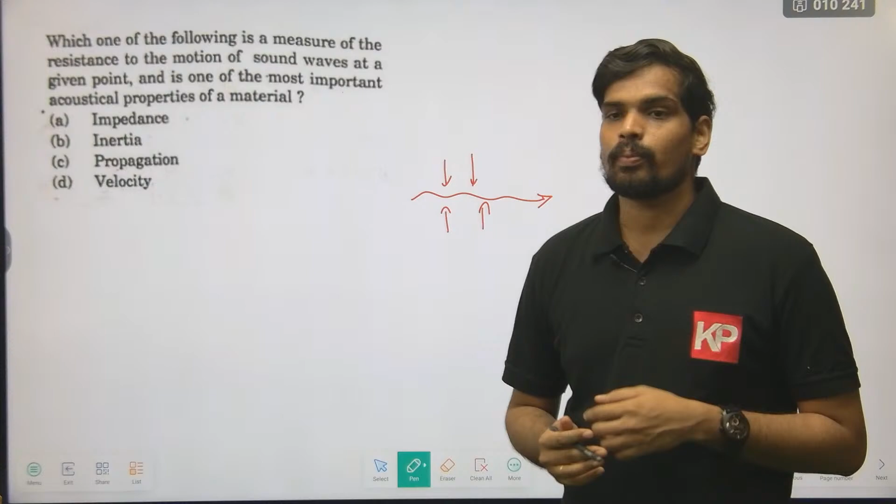For sound to travel, you always require a medium. It could be solid, liquid, or gas. When sound propagates through any medium, the surrounding particles provide some resistance. If this is a sound wave propagating through a medium, the surrounding particles provide a resistance to the propagation of the sound wave, and that is referred to as acoustic impedance.

From the given options, they're talking about impedance, inertia, propagation, velocity. Velocity obviously is distance traveled per unit time. They're talking here about the measure of resistance to the wave propagation. Basically sound is a series of vibrations. If I'm talking to someone in front of me, how does the sound propagate? It travels in the form of vibration of particles, and it reaches the person's ear finally. That's basically propagation of sound.

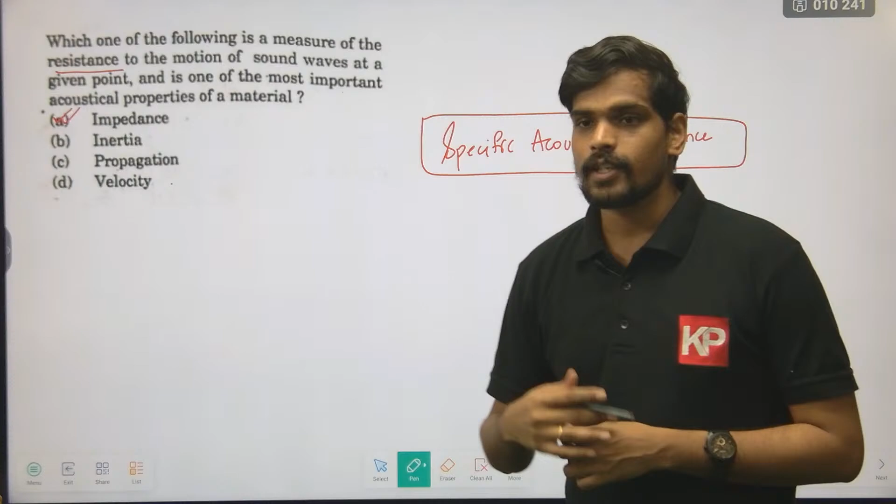During the propagation of these vibrations, the surrounding air particles offer resistance to the propagation of sound, which is referred to as acoustic impedance. There's a term, specific acoustic impedance. Not only the terms, you also can refer to the measurement unit. Generally in competitive exams, you do get questions on the measurement units of various terms, mainly from lighting and acoustics. So you need to be clear with the definitions of terms and the measurement units.

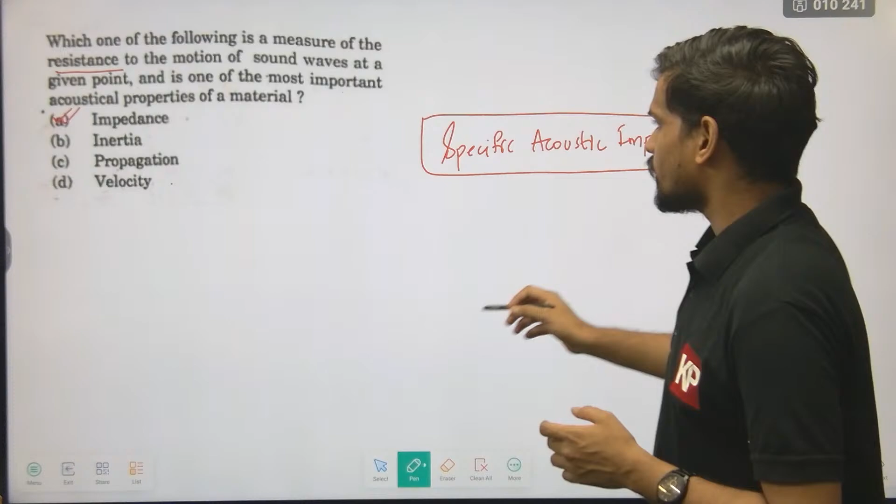Specific acoustic impedance is measured in rayls. That's a non-SI unit. The SI unit is Pascal second per meter. That's the measurement unit for specific acoustic impedance in SI units. So remember, what is impedance? It is basically the resistance to the propagation of a sound wave through a given medium. That's called impedance. So next question.

Consider the following characteristics in the mechanism of transmission of sound. They have given three statements and are asking which of the following statements are correct. The first statement: in solids, acoustic waves are always composed of longitudinal and transverse components for any given type of excitation. These phenomena depend on the types of bond existing between the particles. By reading the first point itself, you need to get a sense of what they are talking about in this question.

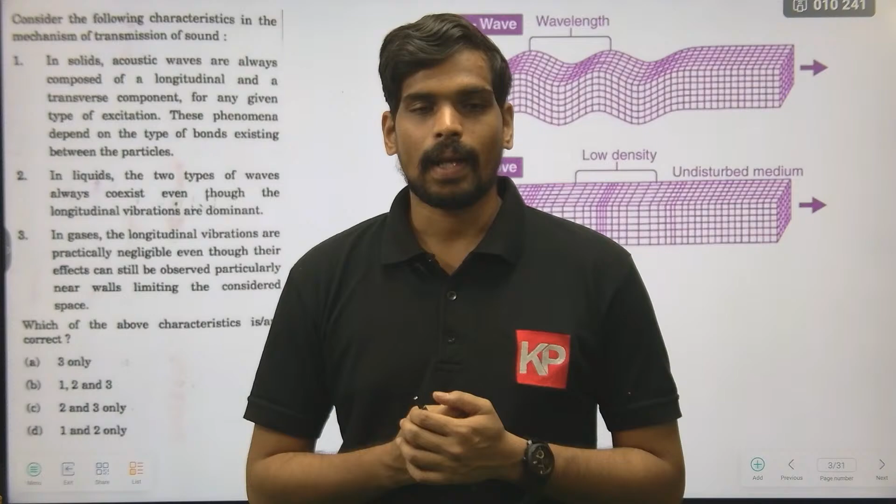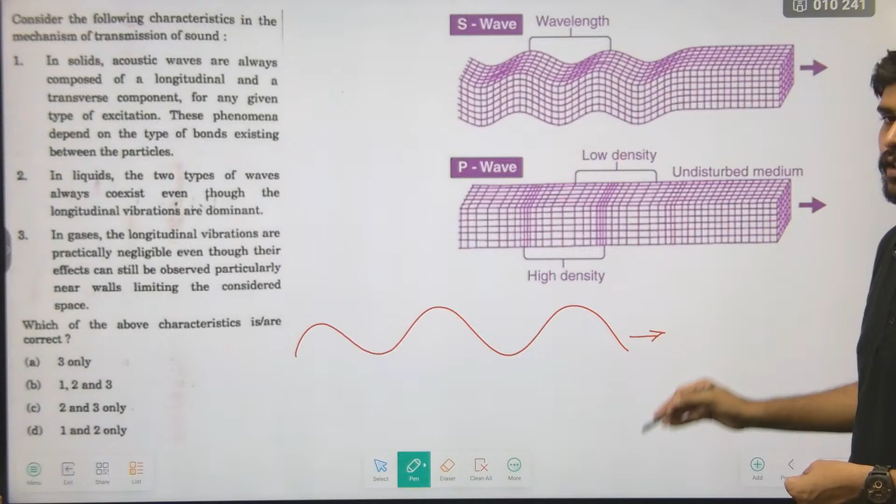They're talking about the types of wave propagation, in which form a sound wave propagates. Wave propagation is predominantly of two types: transverse and longitudinal. Let me give you a brief idea. A transverse wave is where the particles move perpendicular to the direction of propagation. If this is the direction of wave propagation, the particles oscillate upwards and downwards, like water waves in seas and oceans. That's called a transverse wave.

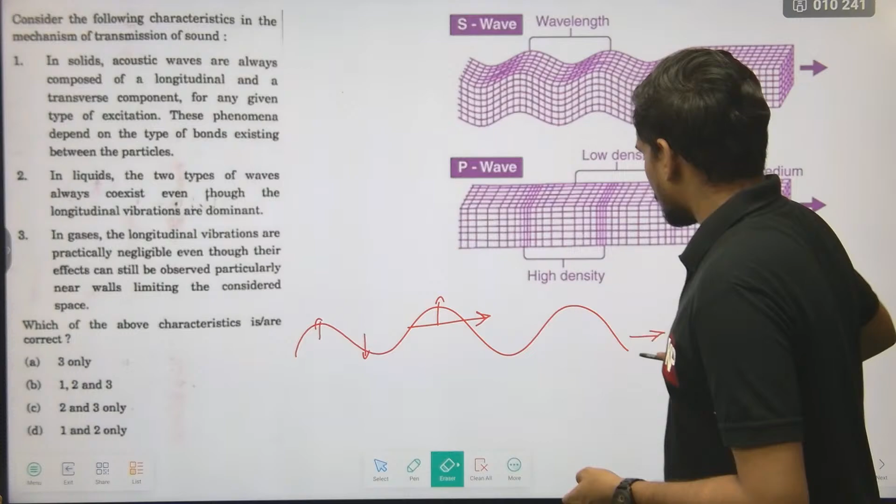Whereas a longitudinal wave is where the particles oscillate in the direction of propagation, generally sound waves in air. Sound waves in air travel in the form of compressions and rarefactions.

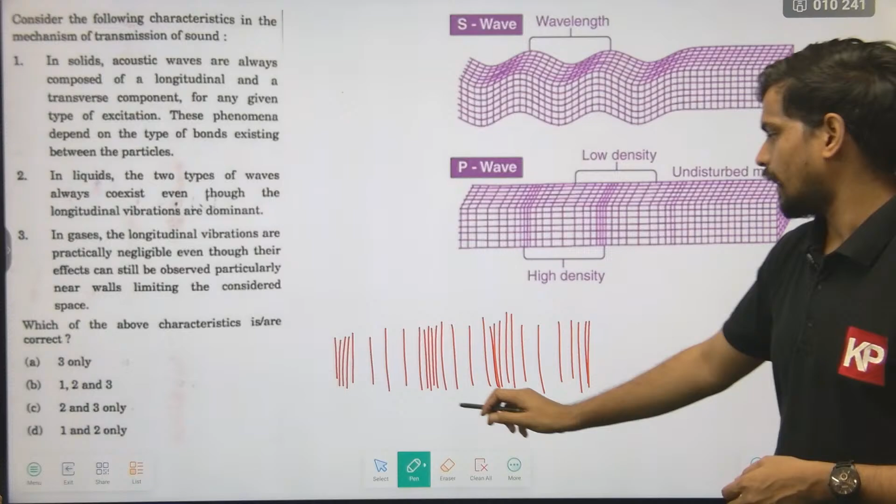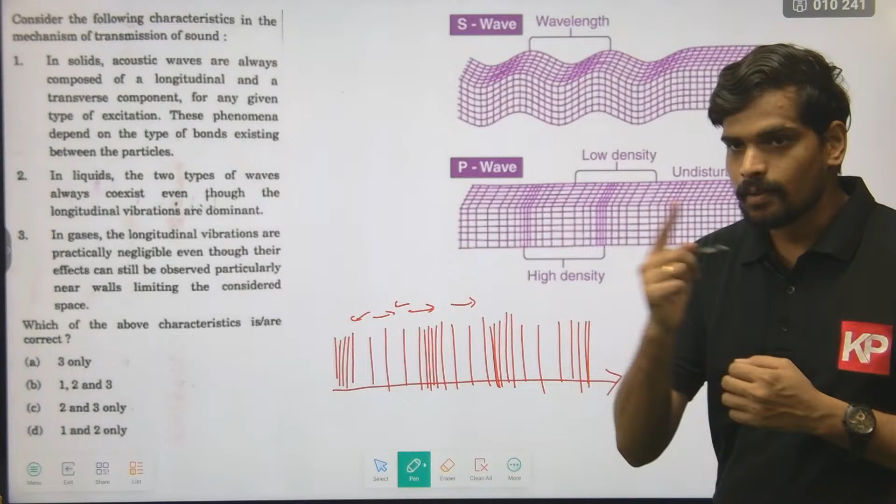A compression is where the particles come close to each other, and then they move further apart. So this is basically how a sound wave propagates in air, in the form of compressions and rarefactions. Here the particles are oscillating parallel to the direction of propagation. The particles are moving forward and backwards. So that's basically a longitudinal wave. So wave propagation is basically of these two types.

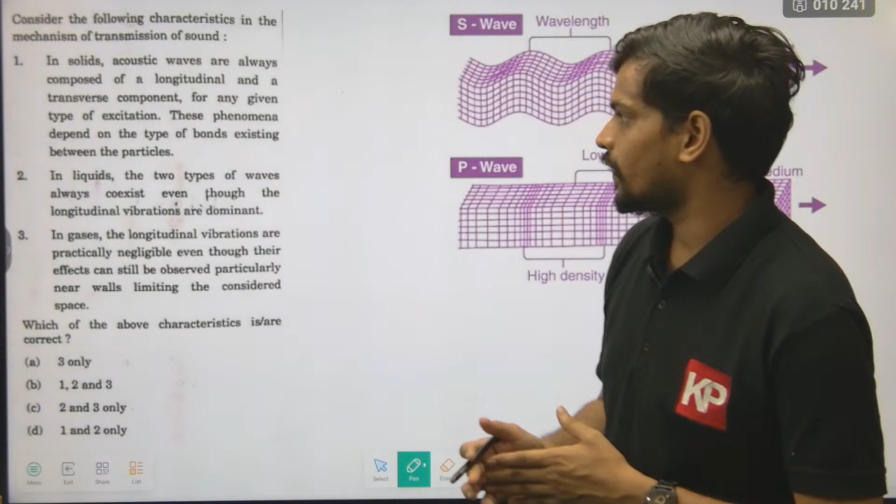Now let us look into the given statements. You can remember one point over here: sound waves, when they travel in air, predominantly travel in the form of longitudinal waves. In other media, they act in a different way. So if you look into the first statement, acoustic waves in solids particularly are a combination of both. One prime example for that would be seismic waves in the form of earthquakes. So I hope you all know about the basics of earthquakes or seismic waves.

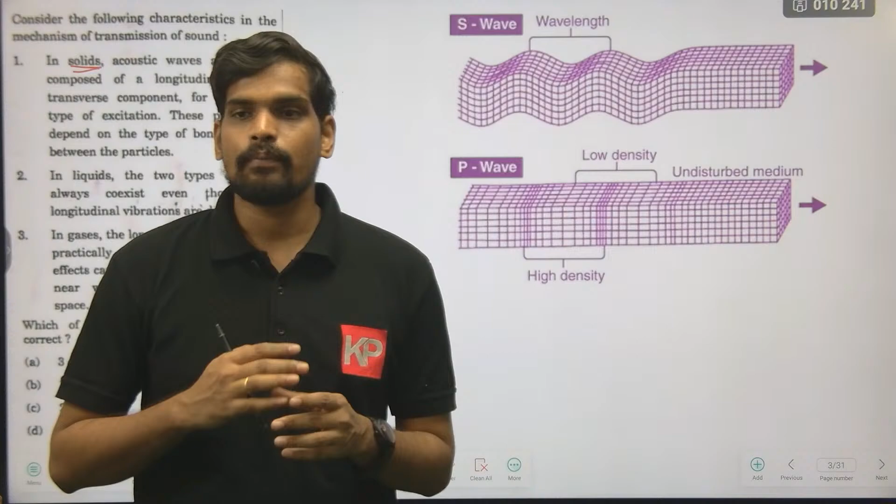You have P waves and S waves. I've added a diagram of it. P waves over here, P stands for primary. The primary waves in seismic waves, that is in an earthquake, propagate in the form of compressions and rarefactions. You can look at that in this picture. That's basically in the form of a longitudinal wave.

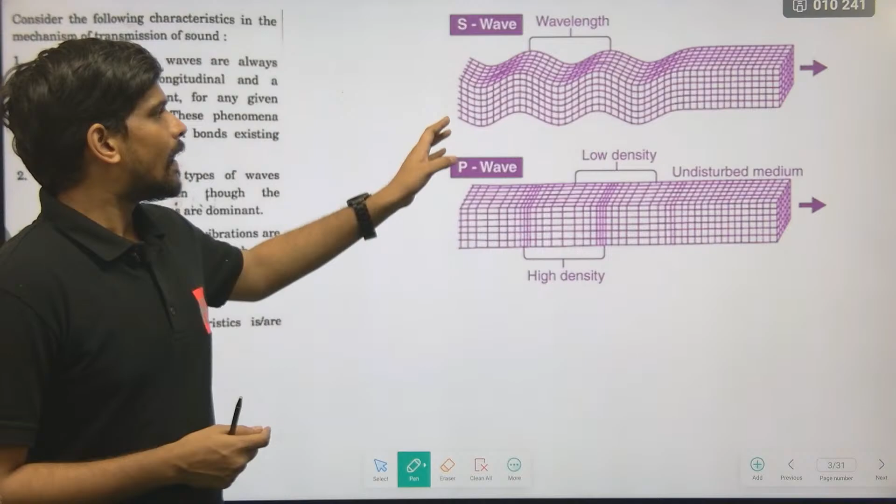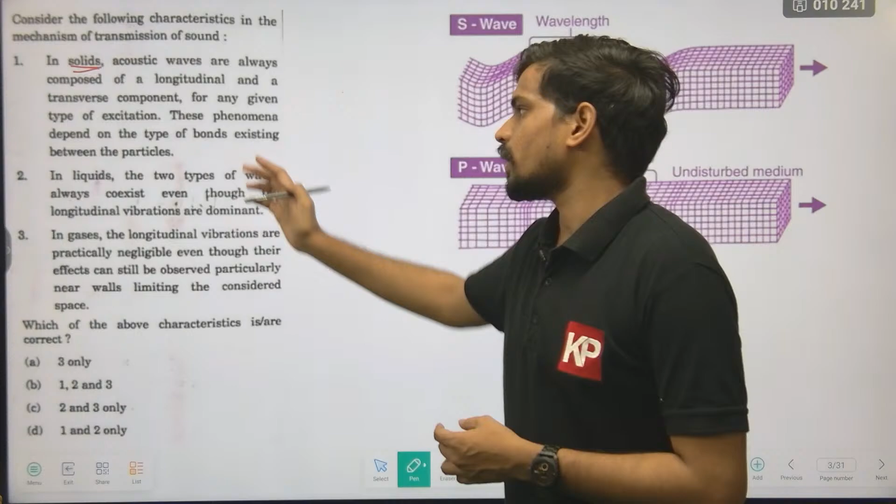The secondary waves or S waves in a seismic wave propagate in the form of a transverse wave. So a seismic wave is a type of acoustic wave which is a combination of both P wave and S wave. There are various other types of seismic waves. So in solids, acoustic waves can travel as both transverse and longitudinal waves, and it depends on the properties of the particles in that medium. So that's a correct statement actually.

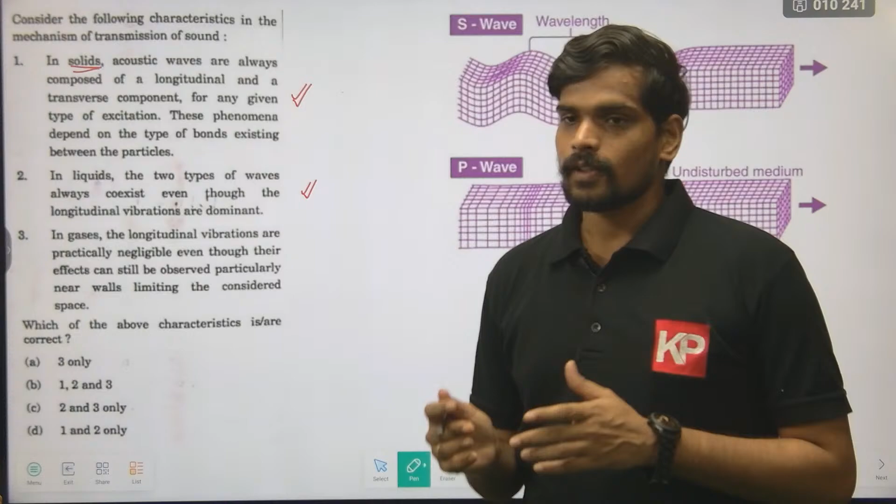The second statement: in liquids, the two types of waves always coexist even though longitudinal vibrations are dominant. That also is correct. So even in liquids, it is a combination of both. However, longitudinal wave propagation is the predominant type of propagation for acoustic waves. In gases particularly, sound always propagates in the form of a longitudinal wave.

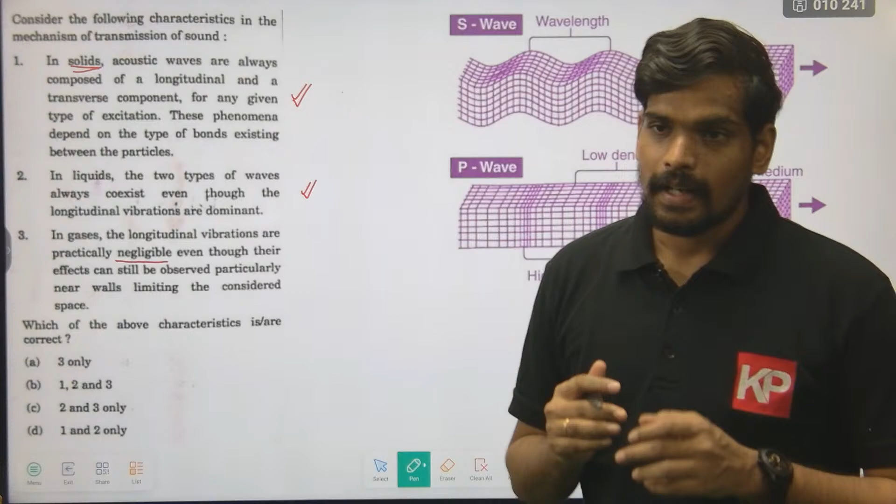So let us see the third option. In gases, the longitudinal vibrations are practically negligible, even though their effects can still be observed, particularly near walls limiting the considered space. That's an incorrect statement, because in gases sound always propagates in the form of a longitudinal wave. Transverse propagation is negligible or not present. So this is an incorrect statement.

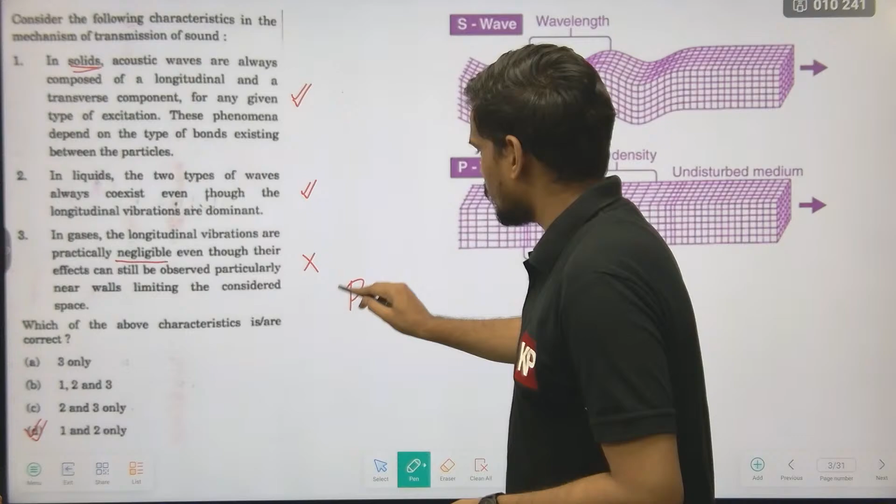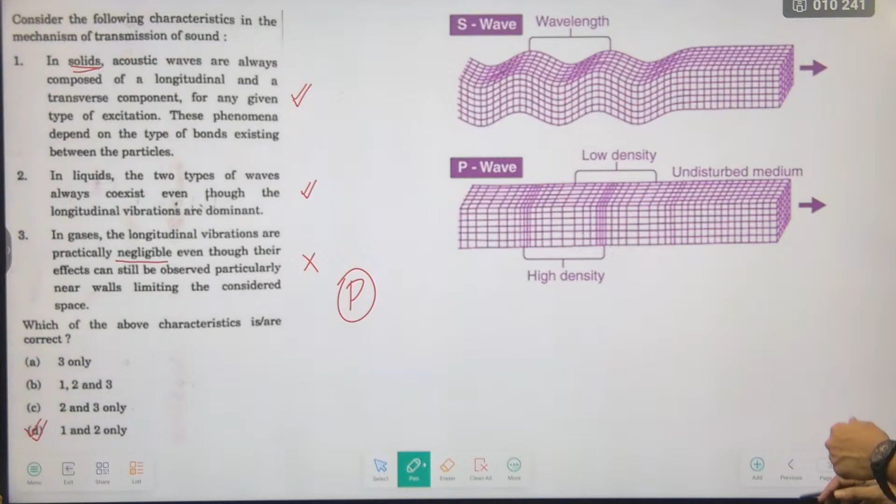The correct statements in the given question will be 1 and 2 only. So option D will be the correct answer here. So remember the propagation of acoustic waves in all three media, and the type of wave in which they propagate. That's about the third question.

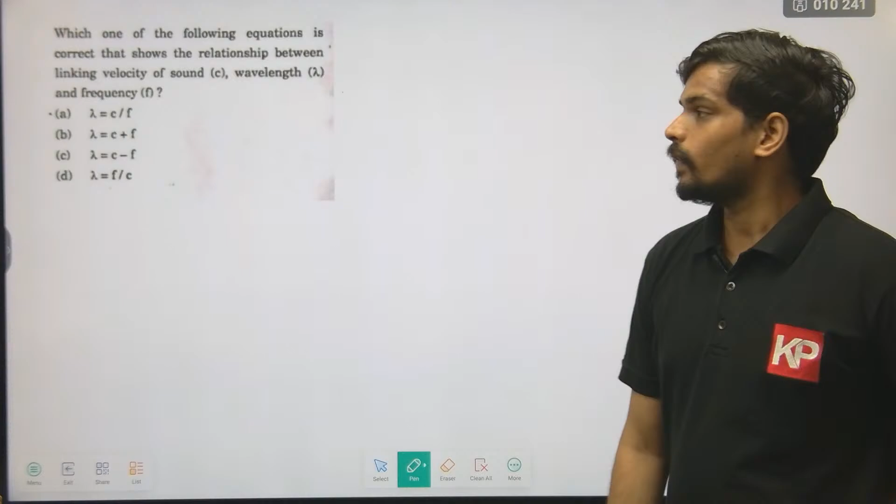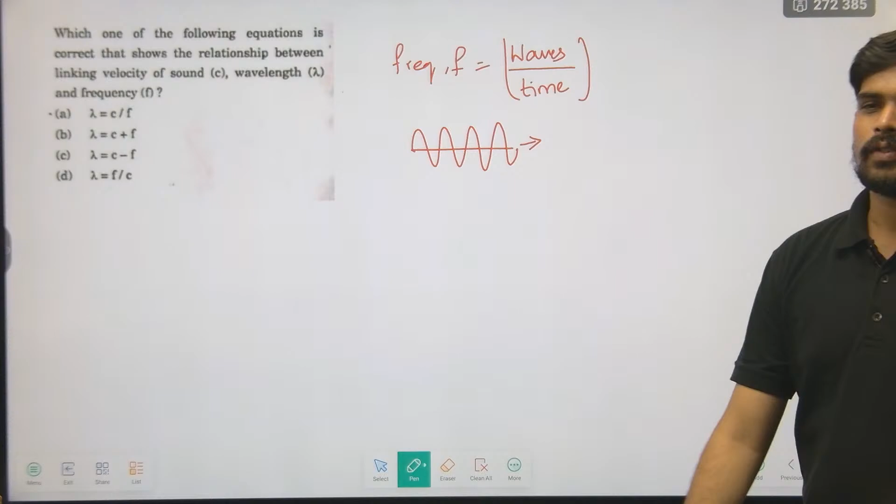So if you look into what frequency is, frequency is nothing but the number of waves propagating per unit time. So it is basically measured in waves per unit time. So in 1 second or in 1 minute, how many waves are propagating, be it longitudinal or transverse waves. That's called frequency. Next is wavelength.

If you're denoting it by lambda, wavelength is defined as the distance traveled by one wave. So distance propagated by one wave, that's called lambda, wavelength. Distance of one wave, distance per wave, horizontal distance traveled by one wave, that's called the wavelength.

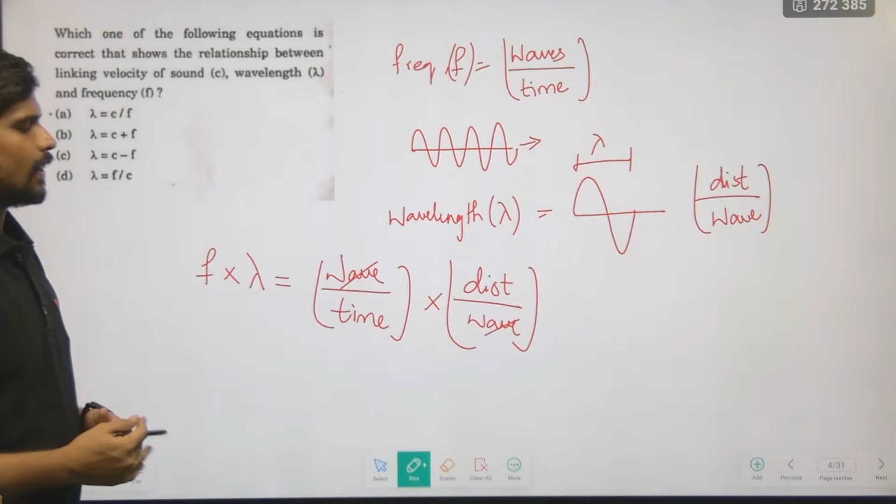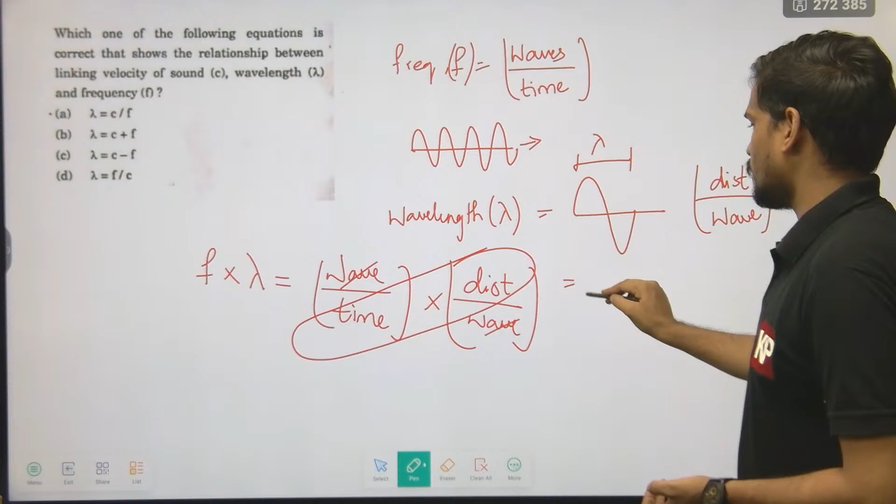If you multiply frequency and wavelength, you will be getting number of waves per unit time multiplied by distance traveled by one wave. That's what you will get. So if you're talking about one wave, if you just cancel that out, you'll get distance traveled per unit time, which is nothing but velocity. Distance traveled per unit time is called velocity. So that's a simple way you can understand, that is C. So C is equal to F into lambda.

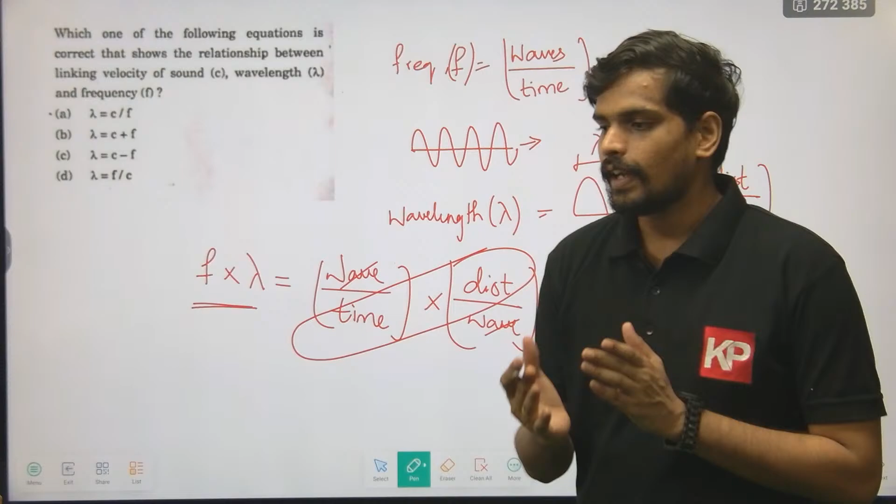They're talking about the relation of wave. They have given the equation in the form of lambda is equal to dash. So if you rewrite the given equation, frequency into wavelength is equal to velocity. So wavelength will be velocity upon frequency, c upon f. Lambda is equal to c upon f is given in option A. That would be the appropriate answer from the given options. So that's a simple question asking a relation between velocity, frequency, and wavelength. Let's now look into the next question.

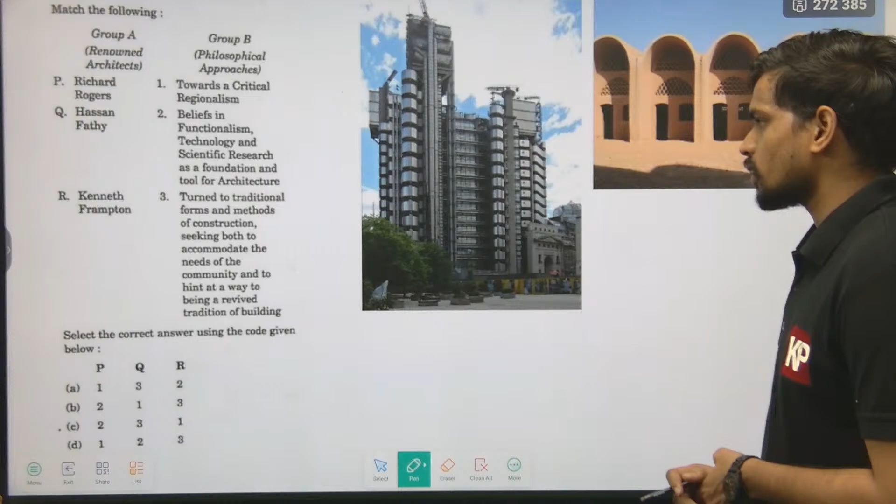The next one, again a question on architects and their works. In Group A, renowned architects Richard Rogers, Hassan Fathy, Kenneth Frampton are given. In Group B, their philosophical approaches are described. You need to match them. So let us go through the philosophical approaches in Group B first. The first one is towards a critical regionalism.

Towards a critical regionalism is a paper published by Kenneth Frampton in the context of modernism and postmodernism. During the time of modernism, he published this paper, where he argued that universality, or design uniform throughout the world, is not something good, and he propagated regional aspects to be included. That was the basic premise of this paper. So Kenneth Frampton is associated with the concept of towards a critical regionalism.

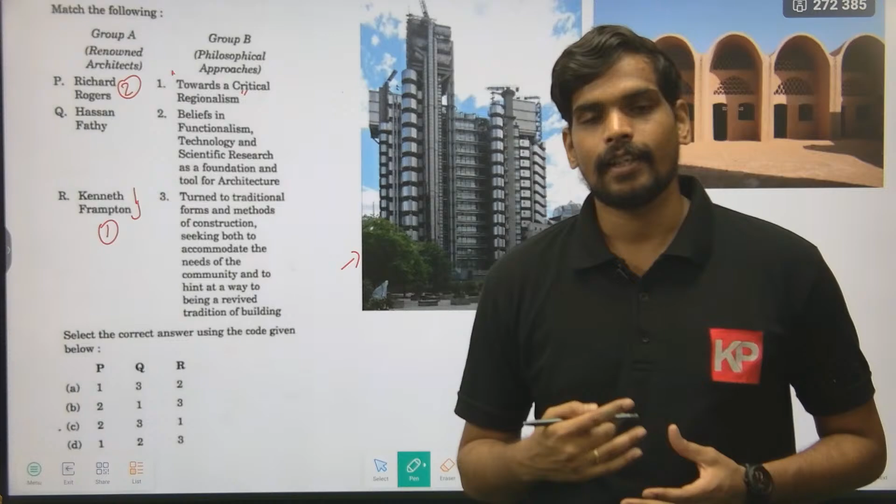So one for R. The second philosophical approach, belief in functionalism, technology and scientific research as a foundation and tool for architecture. This for sure will be architect Richard Rogers. You can see in this picture, I have added a building. Richard Rogers is a British architect well known for propagating the style of high-tech architecture, also called structural expressionism, and he's also associated with Bowellism in architecture.

The building you see here is Lloyd's building in London, designed by Richard Rogers. It is a prime example of Bowellism and structural expressionism, also called high-tech architecture. Structural expressionism is where the structural elements of the building are exposed. Bowellism is a style where the internal organs or service lines of the building are exposed, be it the elevators, staircase, fire safety, or HVAC lines. All these will be exposed outside the building.

The Pompidou Center in Paris is also a prime example of Bowellism. For that, Richard Rogers was a co-architect along with Renzo Piano. So Richard Rogers is associated with a focus on technology and scientific research, with high-tech architecture, also called structural expressionism, and Bowellism.

Hassan Fathy is an Egyptian architect. You can look at an example of the architectural features of his buildings. Hassan Fathy is a renowned Egyptian architect who worked on vernacular concepts of that region. He mainly focused on adobe and earth-based construction. He turned to traditional forms and methods of construction, seeking both to accommodate the needs of the community and to hint at a way to a revived tradition of building.

So revival forms, looking for traditional features, elements, materials and construction techniques which are locally available. That's what vernacular architecture is. So Hassan Fathy is associated with vernacular architecture. So 2-3-1 is the correct answer, which will be option C. You need to understand the architects and their works, the philosophies and the styles they belong to.

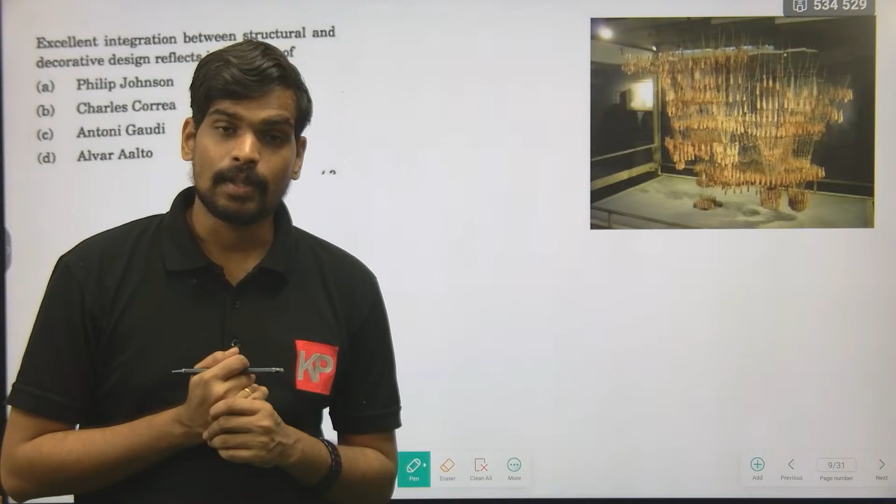The next one, excellent integration between structural and decorative design reflects in the works of Philip Johnson, Charles Correa, Antoni Gaudi, Alvar Aalto. So among the given options, one prime example of excellent integration between structural components and design is the sandbag model, also called the chain model, in which Antoni Gaudi used to suspend sandbags and look at the geometric forms evolved out of this suspension, and he used those to replicate the orientation of building components in various churches. So Antoni Gaudi is the appropriate answer.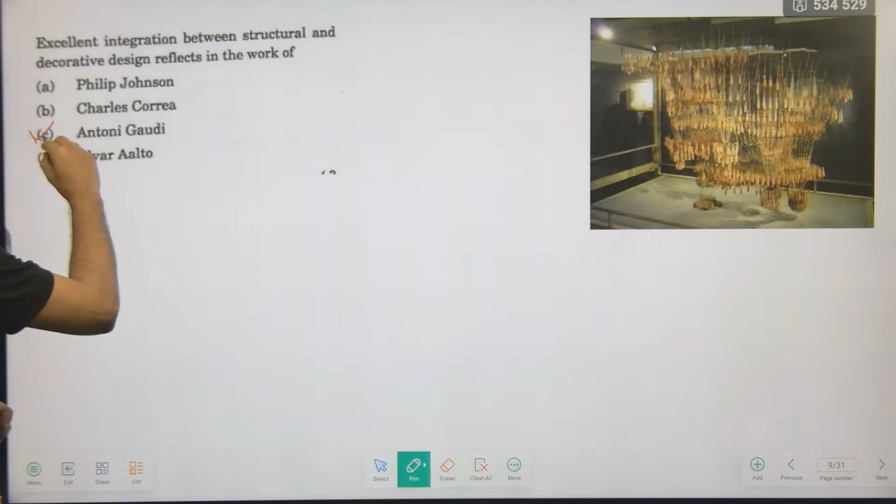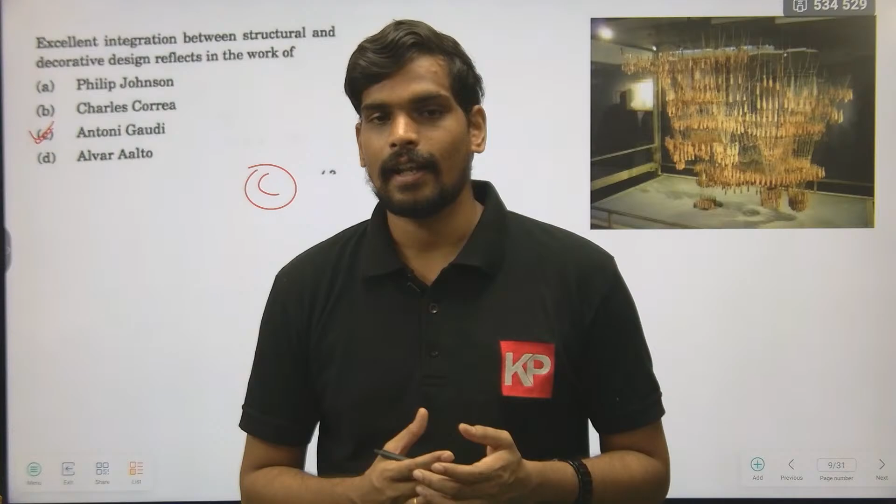Even in a lot of churches designed by him, he made use of such tools of suspension model, where the main motive of him was to integrate the structural and decorative work. If you look into Sagrada Familia also, you see those columns which are not linear, they are inspired from nature. It is also said that Antoni Gaudi developed his ideology towards architectural design similar to biomimicry, where he tried to mimic natural forms like trees, branches, and all those features in his works. So the answer over here is Antoni Gaudi. Option C would be the appropriate answer.

You can remember that during Nazi Germany before World War II, this school was closed down by Nazis, and then Ludwig Mies van der Rohe, who was the last director of this school, started practicing in the United States after leaving Germany. So during the couple of decades for which Bauhaus functioned in Germany, there were three main people associated with Bauhaus. The first one, the founding director, was Walter Gropius.

Walter Gropius was the first architect director of this Bauhaus school. Second one was Hannes Meyer. And third architect director was Ludwig Mies van der Rohe. So these are the three architect directors associated with Bauhaus school of thought, which you have to remember, which can be asked in the examinations too. So answer over here is Walter Gropius, the founding director of Bauhaus.

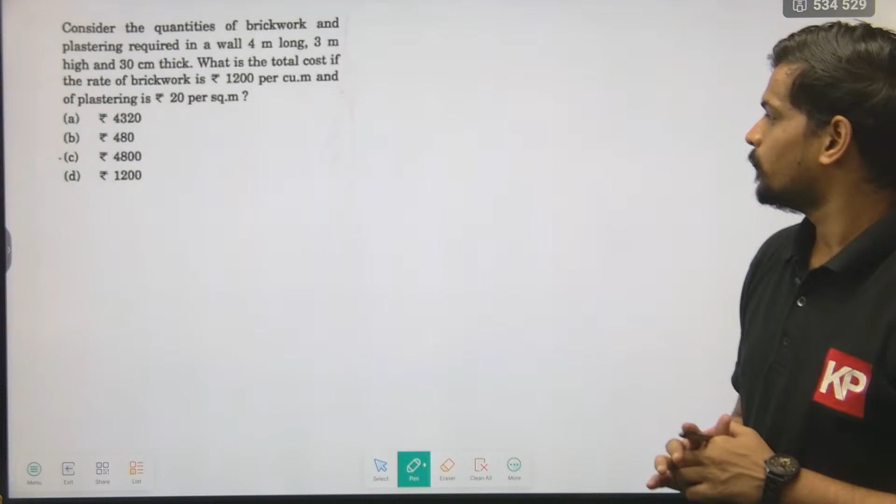Next one, consider the quantities of brickwork and plastering required in a 4-meter long, 3-meter high, and 30 centimeter thick wall. What is the total cost if rate of brickwork is 1200 per cubic meter and plastering is 20 per square meter?

So this is something which is very simple, but remember, in UPSC examination you will not have a calculator with you. So there is no provision where you can carry your calculator, and this is something which you need to solve using pen and paper. So you'll need to do it carefully and not make any mistakes in the multiplication part, otherwise it's a very simple question. Let's look into this.

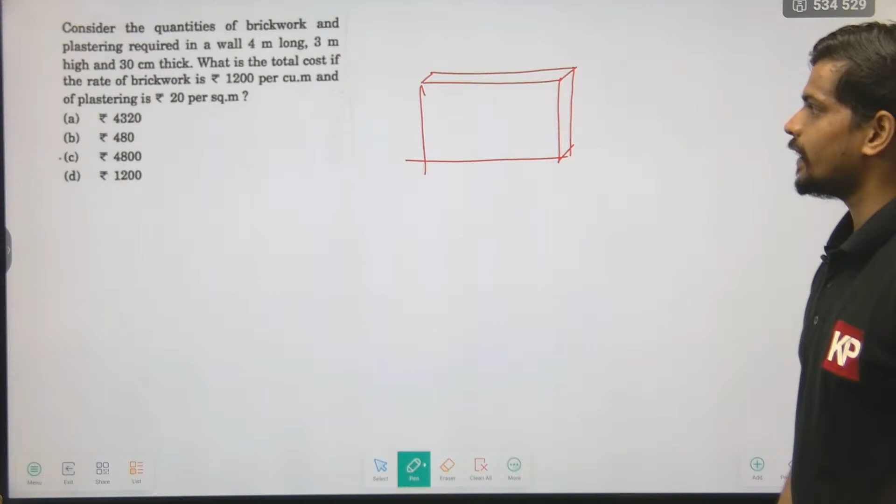So the size of the wall is given as 4 meter by 3 meter. That's the dimension of it. Thickness of it is 30 centimeters. So firstly, let us try to estimate the total quantity of brickwork. The total quantity of brickwork will be 4 meter by 3 meter by 30 centimeters. 30 centimeters, if you convert it into meters, you will get 0.3. So multiplying this, 4 into 3 is 12. 12 into 0.3 will be 3.6 cubic meter. That's the quantity of brickwork.

Now what will be the cost associated for brickwork? It is given in the question as the rate is 1200 per cubic meter. So the cost will be 1200, which is per cubic meter, multiplied by the total quantity of work, 3.6. Multiplying this, I think you should get 4320 rupees. You can cross check, you can do the calculation with pen and paper. So you will get rupees 4320 for the cost associated with brickwork.

But they're also talking about the total cost, not only brickwork. So total cost will also include the plastering cost. So let us look into the plastering now. Always remember, whenever you get questions this way, where they give you a wall and talk about plastering estimation, you should take both the opposite faces of the wall, not just one. So what will be the total plastering work? There will be two faces, front and back, of size 4 into 3. So 4 into 3 is 12, 12 into 2 is 24 square meter. That's the total area of plastering.

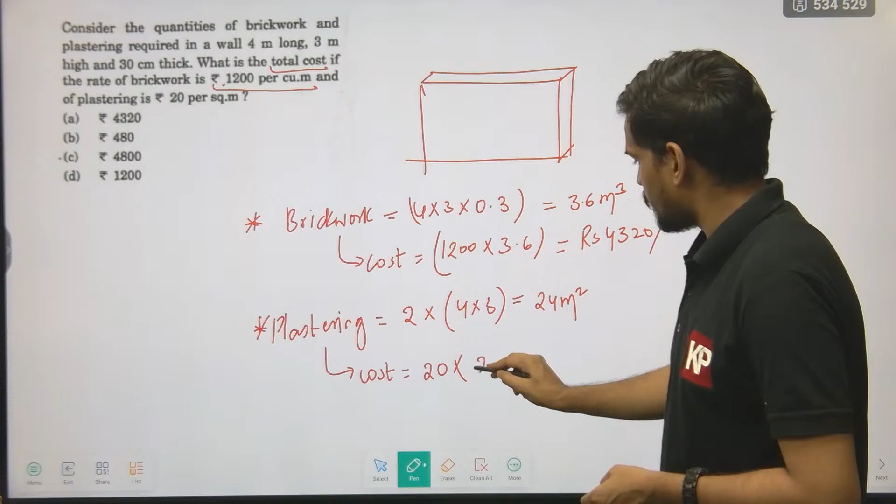The rate is given as 20 rupees. So what will be the cost associated with plastering? It will be cost of plastering per square meter, which is 20 rupees, multiplied by 24 square meter. That's the total work. So this should give you rupees 480. 24 into 2 is 48. So this will give you rupees 480 as the answer for the plastering cost.

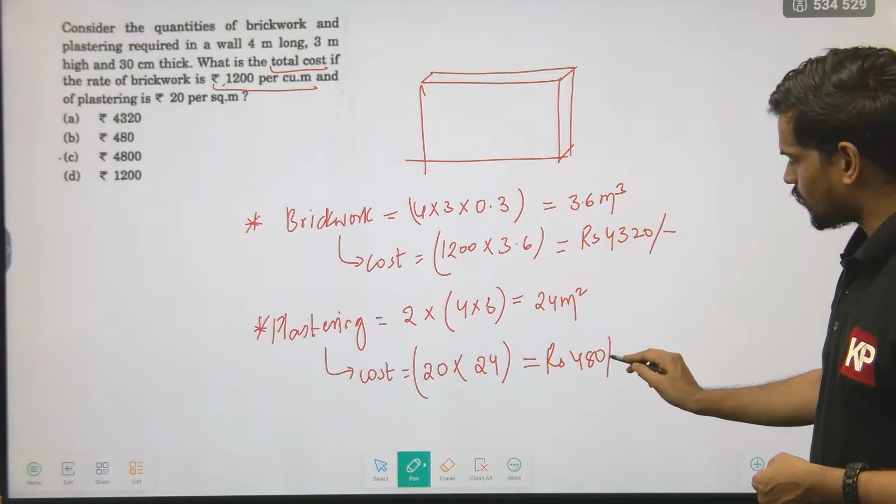Now the total cost will include both these values. This 4320 plus 480, adding these two, I think you should get the answer as 4800. So option C will be the appropriate answer. 4320 plus 480 will give you 4800 as the correct answer for this question. So it's a simple question which is based on simple math, nothing difficult at all. So next one.

Consider the following statements. Again, this is a question related to the estimation and specification topic. Consider the following statements regarding the process of preparing a building estimate. So while preparing an estimate, they're talking about some quantities of works. So first point: pointing is calculated in square meter for the whole surface and deductions similar to plastering are made. Now what is pointing? You can answer this question only if you know what pointing is. Pointing is nothing but finishing of the mortar joints.

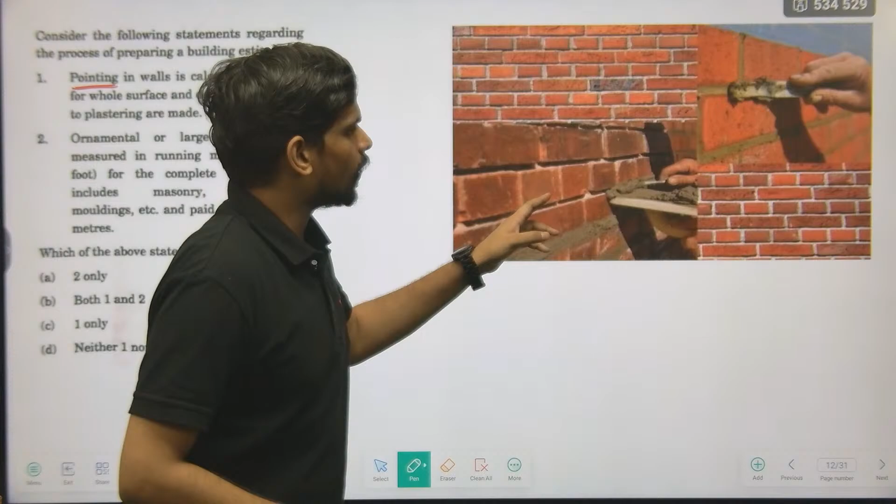If you look into this picture, this is an exposed brickwork. You have these mortar joints. You cannot leave them unfinished if it is exposed brickwork. Particularly in exposed brickwork, you need to finish them to give a smooth surface or a smooth line of different profiles, which is generally done using this tool used in masonry work, which is called a jointer.

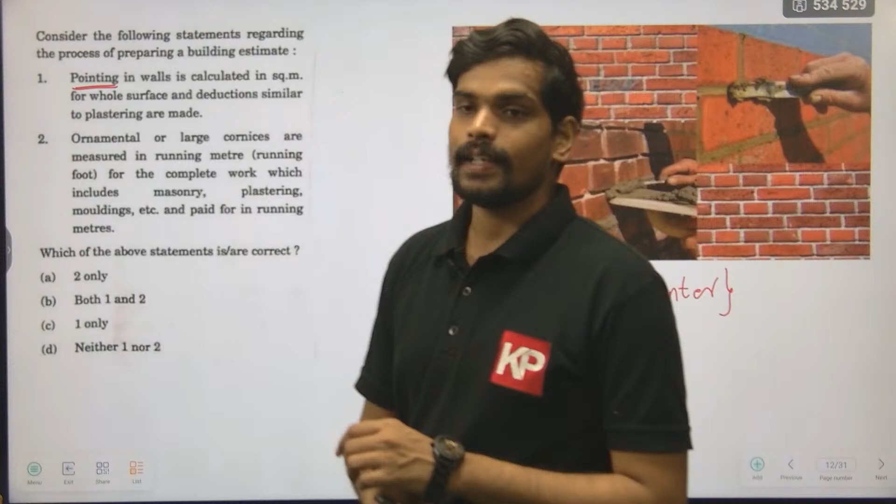This is a question which was asked in a competitive exam once, I think in DDA, not in UPSC, but it has been asked in the past in a competitive exam. What is the use of this tool jointer in masonry? It's a tool which is used for pointing work. Pointing is nothing but finishing of mortar joints.

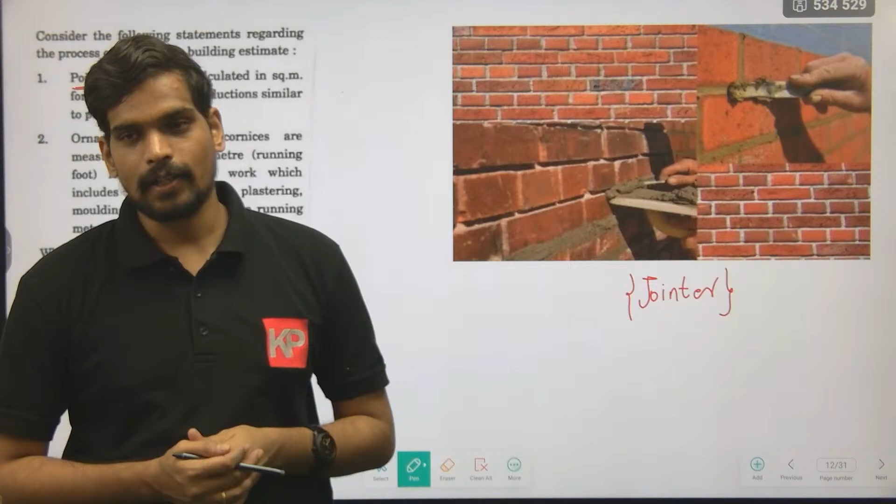Now this is estimated. Just imagine if you're looking into a wall, you will have pointing work not only in one dimension. If you just observe, pointing is not just a single straight line. You also have the vertical joints, right? So pointing work is not only associated with horizontal ones, but also with the vertical lines.

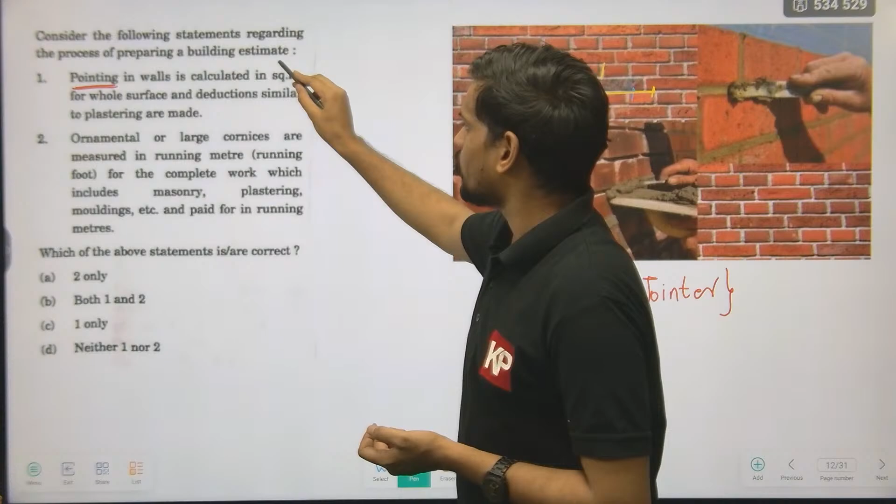Now if something is only linear, only in a straight line fashion, that's where you measure it in running meters. But here they're talking about square meter. Is that correct? Absolutely yes. Pointing is measured in square meter because it's not a linear work. It is something where you have horizontal and also vertical lines. It is generally estimated just like plastering.

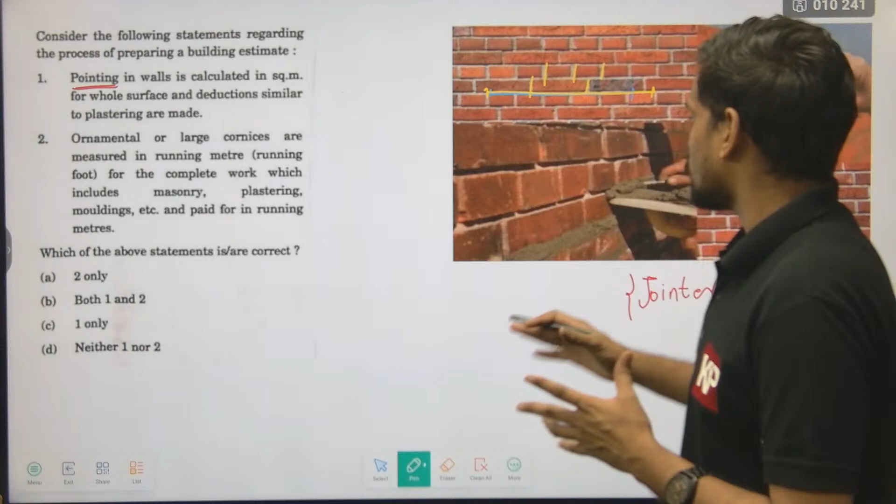Generally, as a thumb rule, mortar of around 0.6 cubic meter is used for every 100 square meter of pointing. So based on the total work of pointing, the quantity estimation is generally done for pointing work, and the estimation is always done in square meter. In BOQ also, pointing is always measured and noted down in square meter only.

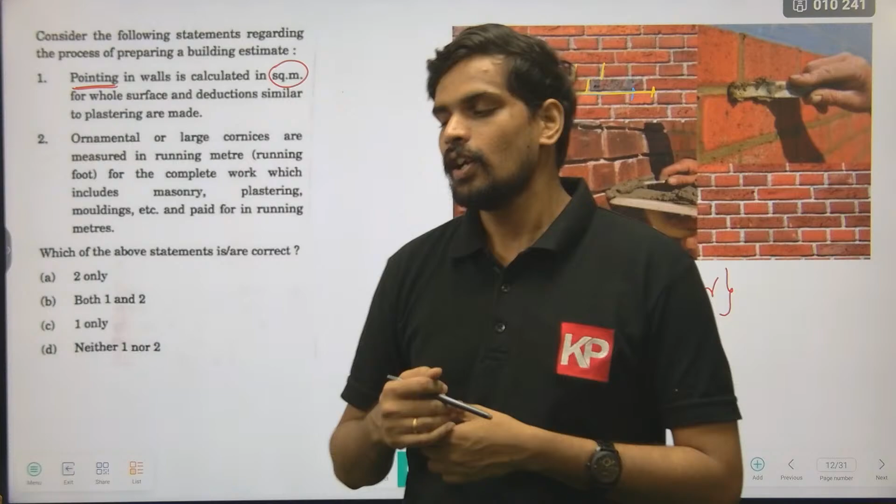Deductions are similar to plastering: deductions will include the door and window areas, or say the jamb surfaces of openings. All these are the deductions. Even for pointing you will have the same deductions. In a wall, if you're having a door and window, that will come under the deduction part. So this first statement is a correct statement.

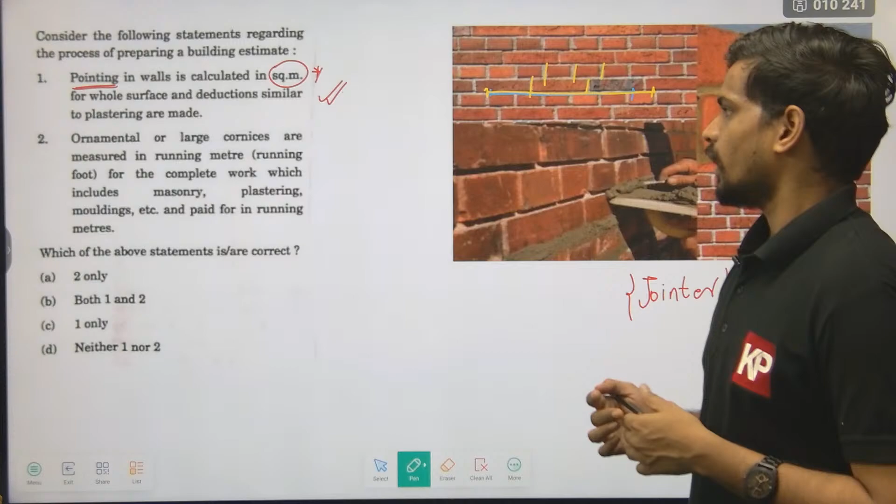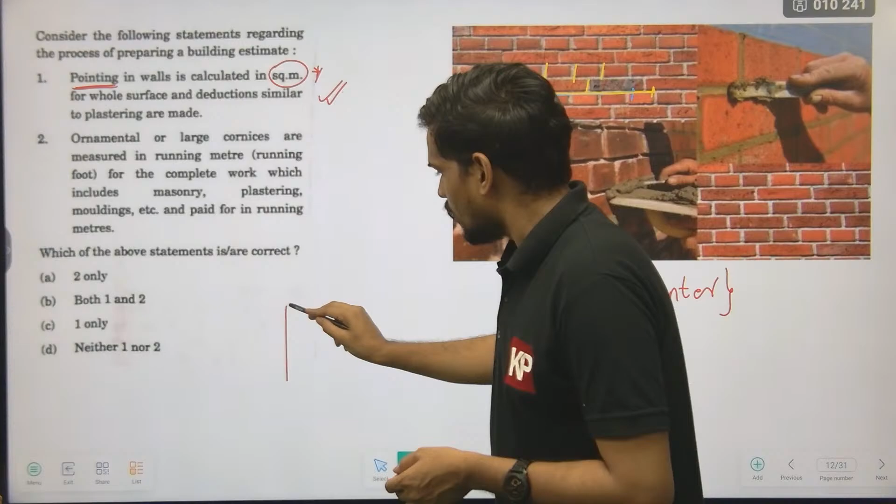Second statement, ornamental or large cornices are measured in running meter, running foot, for complete work which includes masonry, plastering, molding, etc., and paid for in running meters. So ornamental cornices, what is a cornice? A mold which is used generally along the 90 degrees formed at the intersection between walls and roof surfaces. Say this is a wall and a roof surface. You have cornice, generally a molding which is provided at these 90-degree angles.

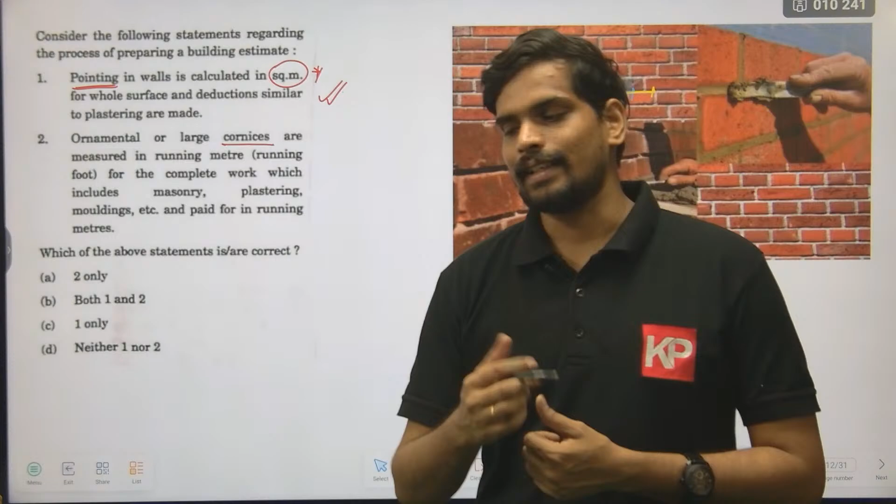So cornice work is generally measured in running meters because these are ornamental bands. What is a cornice? Cornice is nothing but an ornamental band, an ornamental molding band which is used in construction. So that is measured in running meters. So both 1 and 2 should be the correct answers. So option B will be the appropriate answer for this question. Which of the statements are correct? Both 1 and 2. Next one.

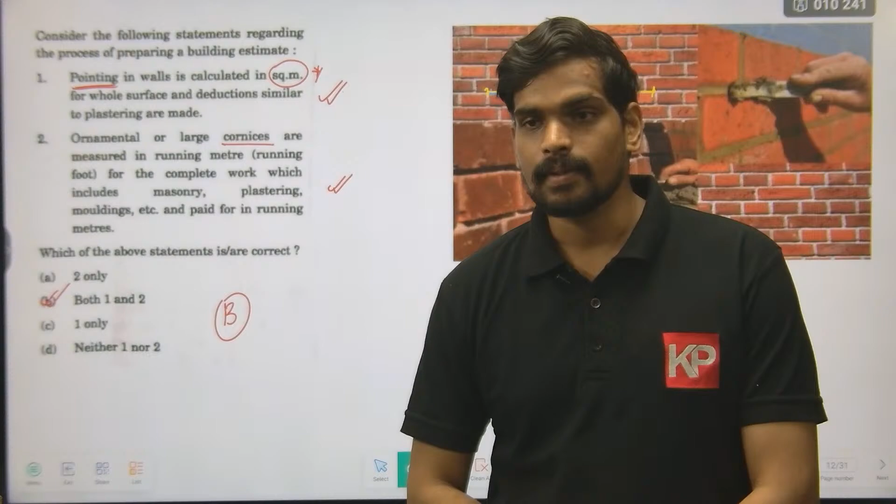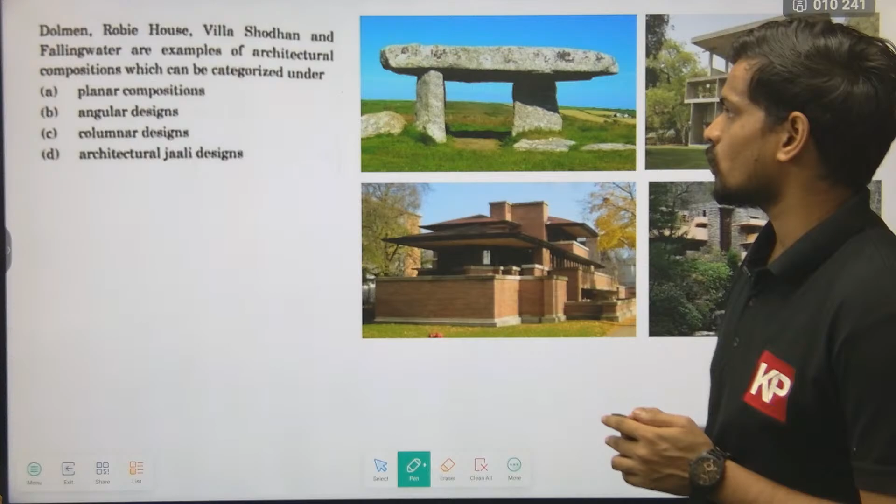Dolmen, Robie House, Villa Shodhan, and Fallingwater are examples of architectural compositions which can be categorized under dash. They're not asking about the architect over here, they are rather asking about the design features of buildings. So when can you answer this question? You should never learn by heart, okay, it's so and so building, like for example, Robie House was designed by F.L. Wright, Villa Shodhan was designed by Le Corbusier. Don't learn the names by heart that way.

While looking into the architects and the works, you should also visualize the buildings and try to remember their form, because form based questions or architectural design based questions can also be asked in the UPSC examination. So I've compiled the pictures of all these four. Dolmen is a prehistoric, or you can say a stone age structure; stone age burial sites are generally referred to as dolmen. Then you have Villa Shodhan, designed by Le Corbusier, which is in India.

Then you have Robie House, which is a prime example of the prairie style architecture propagated by F.L. Wright. Then you have Fallingwater, which again is a prime example of the organic architecture concept given by F.L. Wright. So you should not only remember the architects and names of the buildings, you should know the theories given by them. Like Robie House is based on the principle of prairie style architecture, and Fallingwater is based on the organic architecture concept given by F.L. Wright.

So what are these? What is organic architecture? What is prairie style architecture? What is the Usonian house concept given by F.L. Wright? You need to study all these, make a note of them and remember these points for your examination.

However, if you look into the form of these and see which of the following options are appropriate: planar compositions. Planar compositions are where you have plane surfaces. What is a plane? Basically a 2D surface. Do you have plane projections, planes coming out in the composition? That's probably yes. Let us look into the other options also. Angular designs. Angular composition is not something which is common over here, so that is for sure not an answer.

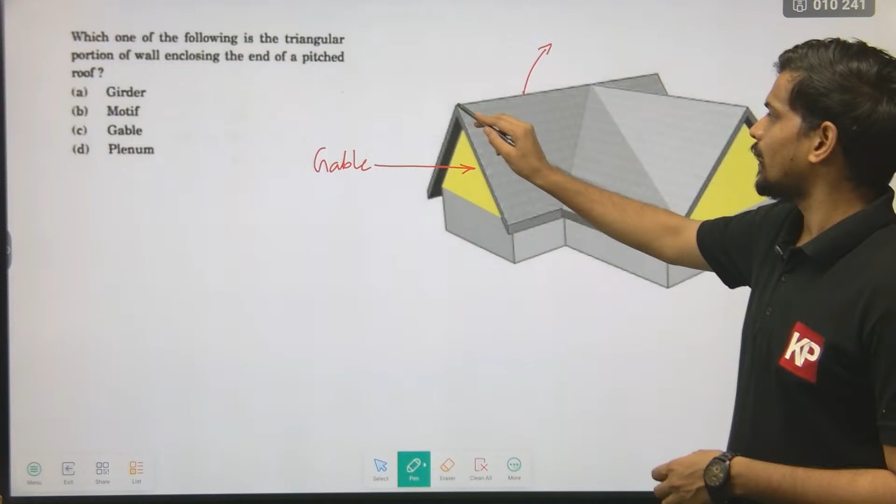Other terms associated with pitched roofs include: the top line along the pitched roof is called the ridge, and the inclined edge formed due to intersection of two sloping roofs is generally referred to as the valley. And the slight projection coming out from the wall is referred to as eaves.

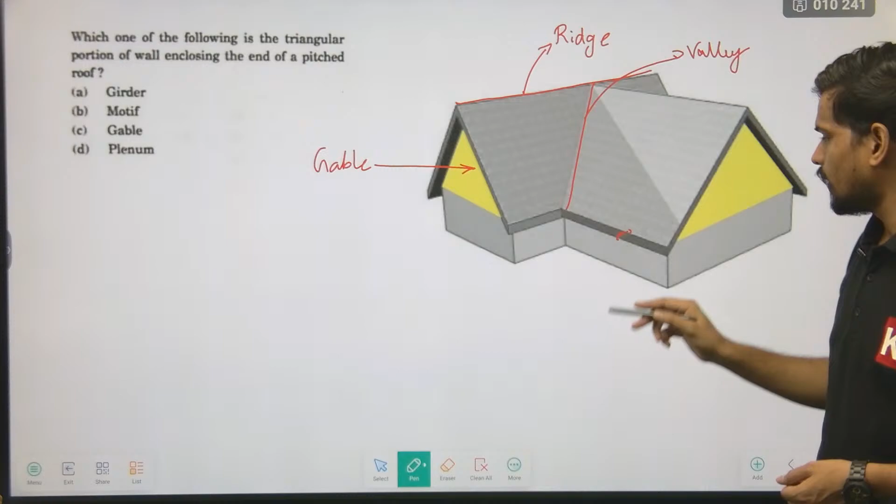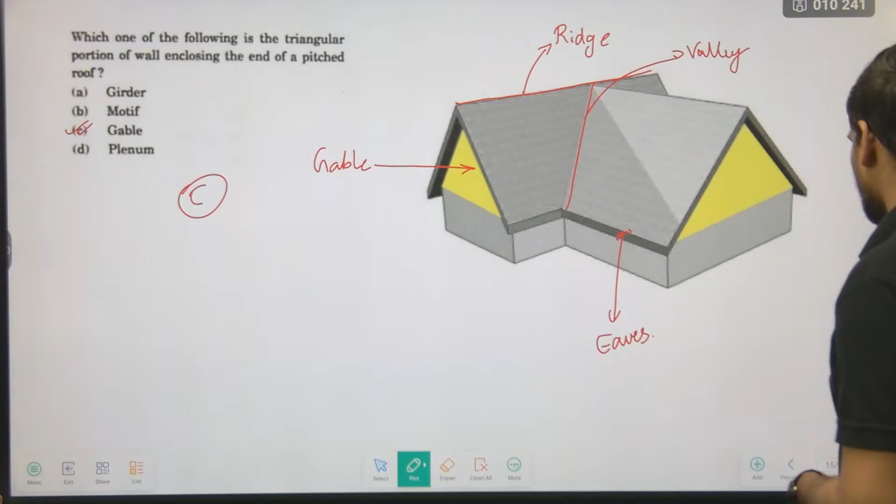So these are some terms which you can remember with respect to pitched roof. From the given options, the appropriate answer will be gable, the triangular part of a pitched roof. Triangular part of a wall which is used to cover the area below the sloping roof is called a gable. So C will be the appropriate answer for this question. A simple question from building construction.

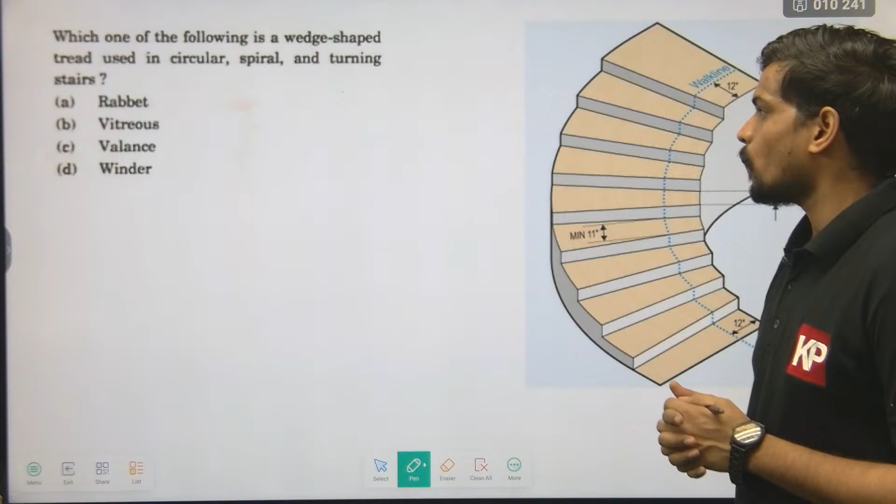Next question, this also is from the same area of building construction. They are asking, which one of the following is a wedge shaped tread used in circular, spiral and turning staircase? In normal staircases, dog leg staircases and all, you will have normal rectangular treads. You will have steps which are all rectangular in shape.

But in a spiral, circular or turning staircase, you cannot have perfect rectangular treads. Rather, you have wedge shaped blocks or wedge shaped treads. You can see in this picture also, the width is not the same at both ends. At the inner edge the width will be less, at the outer edge the width will be more for each and every tread. Such treads which are wedge shaped are referred to as winders in architecture. So D will be the appropriate answer.

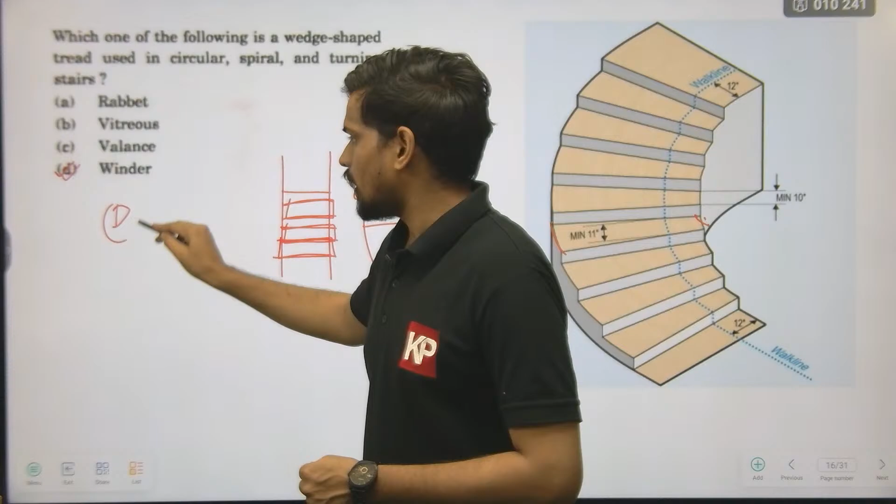What are winders? Winders are wedge shaped steps which are narrow in the inner part of the spiral, wider at the outer part or outer curve of the spiral. That's basically what a winder is. So D will be the appropriate answer for this question.

Next one. Again a question from Architects and their Works, where they have given 4 buildings and they're asking which of the buildings is not designed by Le Corbusier. Option 1, Carpenter Center for the Visual Arts, Harvard University, Cambridge, Massachusetts. Taliesin West, Scottsdale, Arizona in the United States. Mill Owners Association Building, Ahmedabad in India. The High Court, Chandigarh Capital Complex in India again.

These, I hope you know, are the best examples of Le Corbusier's design in India. The High Court in Chandigarh and the Mill Owners Association in Ahmedabad are both works of architect Le Corbusier. Option A, the Carpenter Center: it is said that in the whole North American continent, there's only one building completely designed by Le Corbusier, and that is this. So this also is designed by Le Corbusier.

Carpenter Center of Visual Arts. This is a modernist style building designed by Le Corbusier in the United States, the only building designed by him in the US. There are 1 or 2 other buildings in which he worked along with other architects, but the only building completely designed by Le Corbusier in North America is the Carpenter Center.

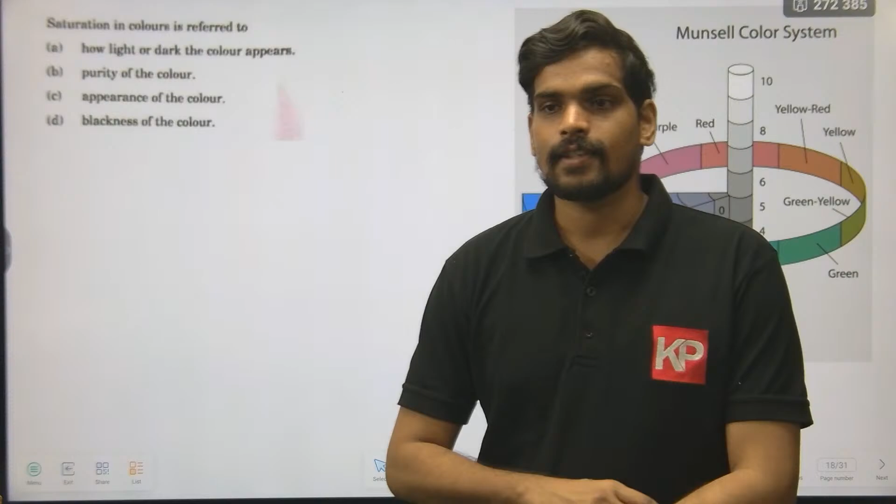The Munsell color system is basically a color solid, sometimes called the Munsell color solid, given by a person associated with geography and the study of soil. It was developed by Munsell to color code the various gradients of colors in soil conditions. That was the idea with which this system was originally developed.

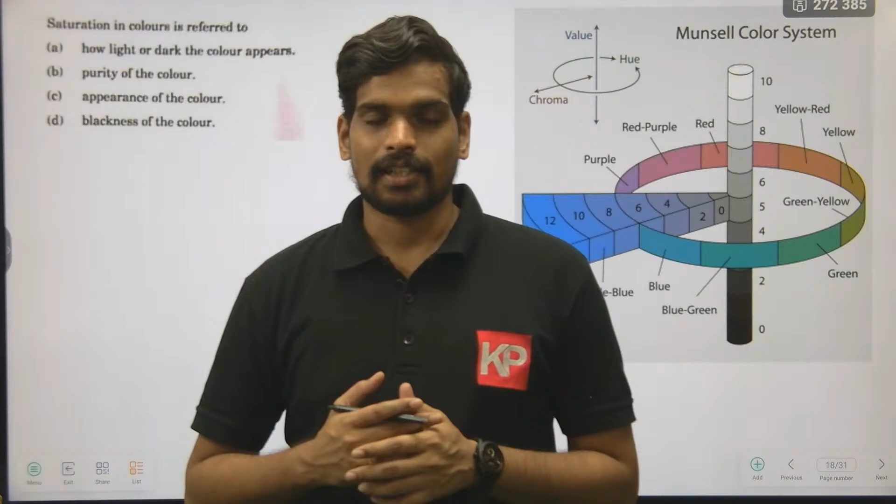In this color solid, all the colors are arranged in a three-dimensional composition based on three properties: hue, value, and chroma. You can see in this picture, hue is basically a measure of the distinctness of a color. In the Munsell color system, there are a total of 10 hues, of which there are primary hues and secondary hues. The primary hues you can see: red, purple, blue, green, and yellow.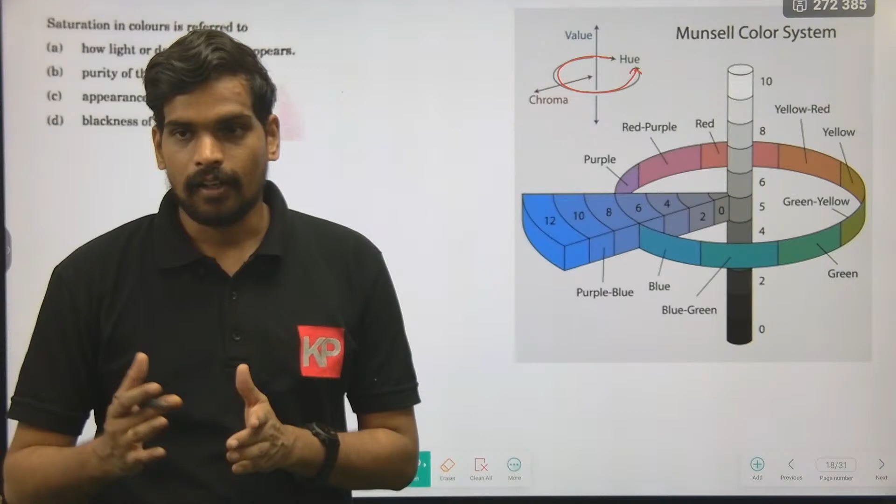These are the 5 primary hues in Munsell color solid. There are 5 intermediate hues. Intermediate hues include blue-green, purple-blue, red-purple, yellow-red, and green-yellow. These are intermediate hues which are between the primaries. So all these are called as hues of a color, hues in a color solid. Hue is basically distinct colors, branches, you can say. That's called as hue.

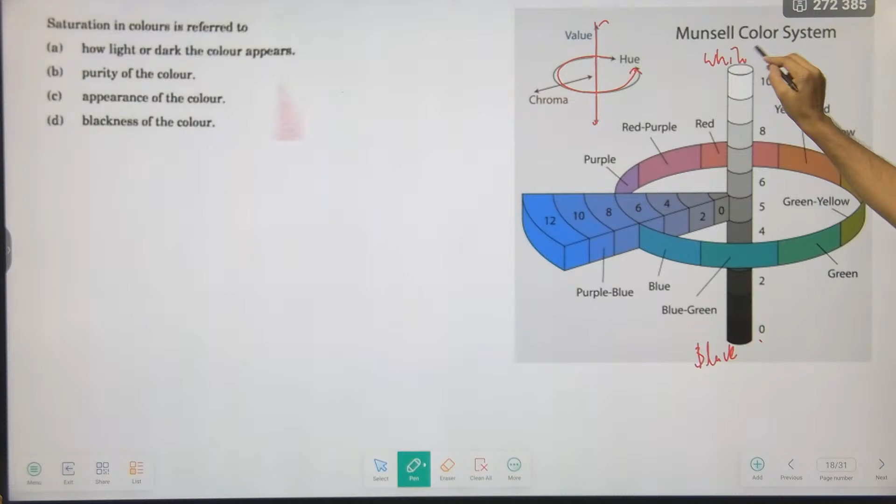Then you have value. Value is associated with the central axis. You can see along the central axis, ranging from 0: value of 0 associates with black, value of 10 associates with white. So in the center of the axis you have arrangement from black to white. So all the colors, based on how close they are to black or how close they are to white, are arranged along the vertical axis, which is called as value of the color.

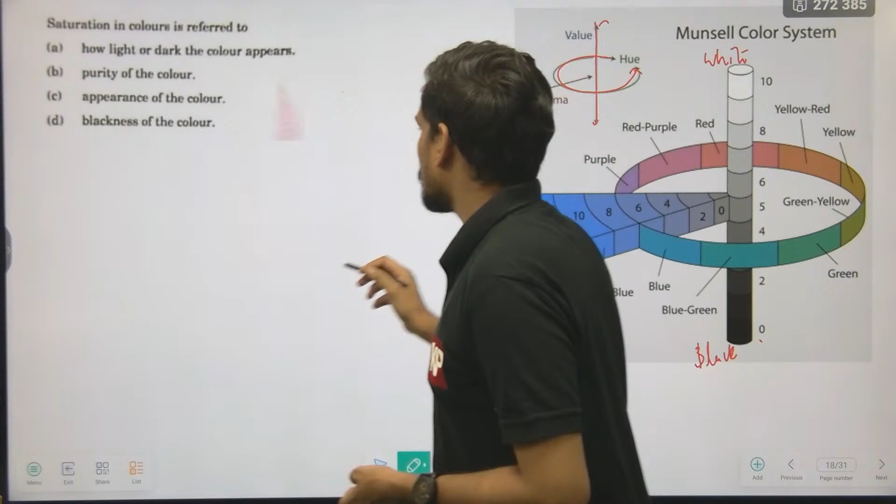Then you have chroma. Chroma is basically purity of the color. You can see in this picture, impure is in the center. As you move outwards, the purity increases. Purity is also called as saturation. So remember these terms: hue, value, and chroma. These are the three branches on which colors are arranged in Munsell color solid. Hue talks about the distinctness of the color. There are 5 primary hues and 5 intermediate hues in Munsell color solid.

Value is a measure of black and white. So it's on the scale of black and white from 0 to 10. So it is measure of how light or dark a color appears. So this is basically option A is value. And the third one is chroma. Chroma is a term which talks about purity of the color. It is basically also called as saturation. Saturation is how pure a color is.

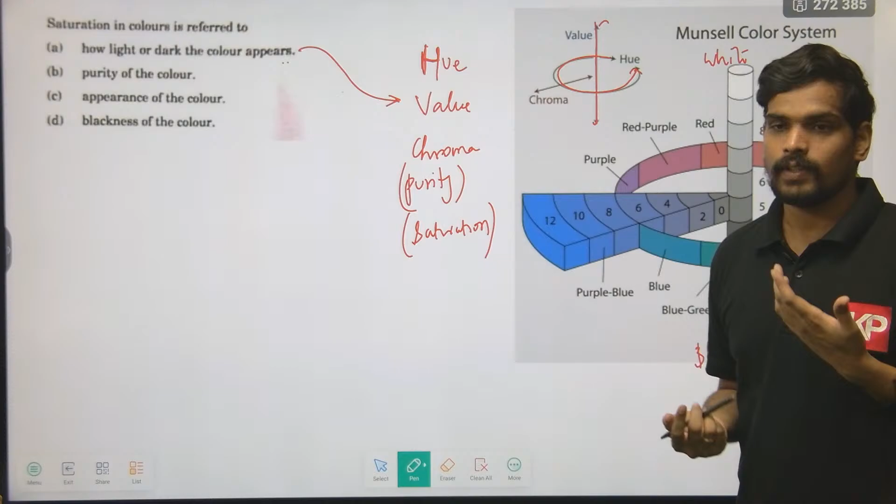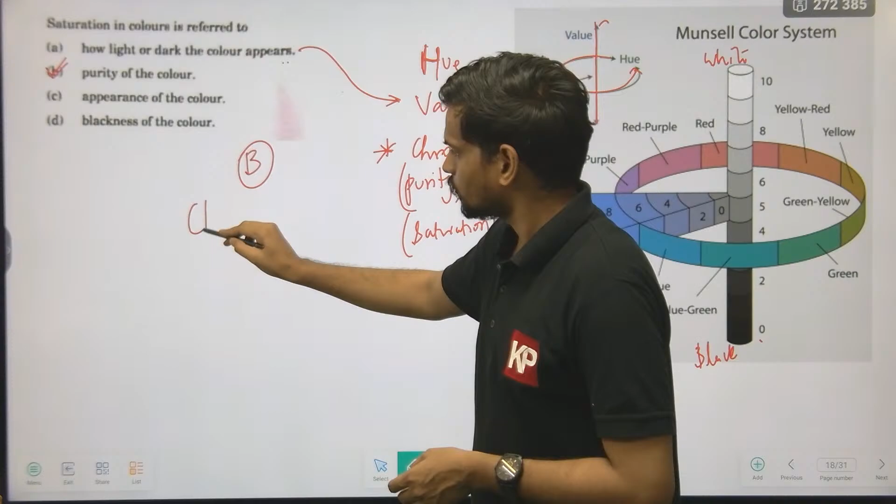So as you move outwards, it is getting saturated with color. Saturated with color, purity is increasing. So chroma is increasing. So purity and saturation are alternative terms for chroma itself. So if you see, they're talking about saturation of the color is referred to as purity of the color. So B will be the appropriate answer. And in Munsell color solid, saturation or purity is referred to as chroma. So remember that. So B is the answer for this question. However, there are one or two more questions again from Munsell color solid. Moving further, we will discuss them as well.

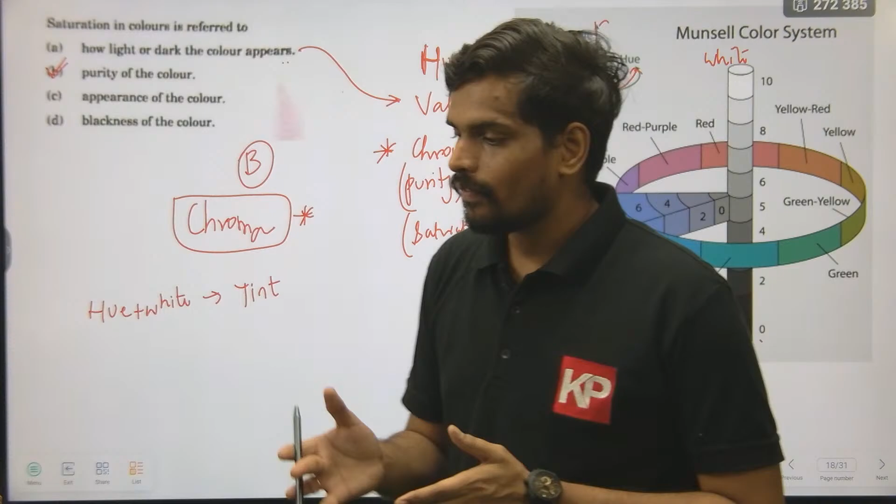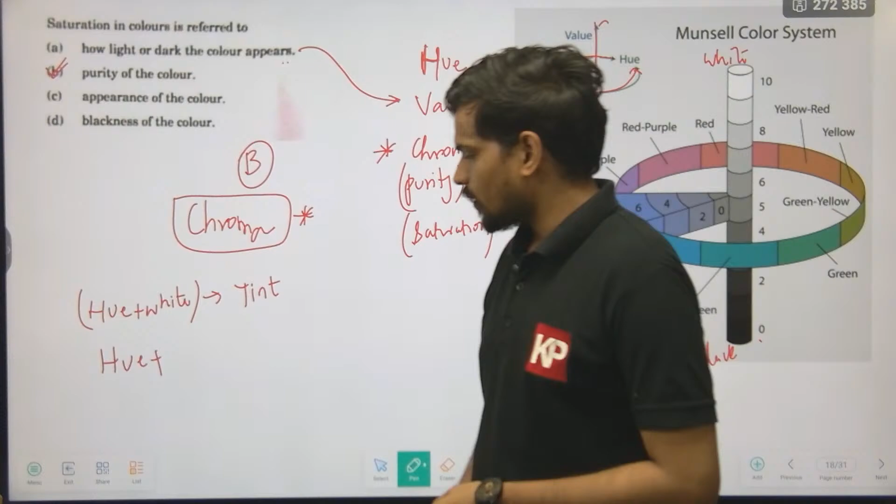In addition to these terms, hue, value, and chroma, you also should remember 3 more terms: tint, tone, and shade. If you take any hue and mix it with white, you will get tints of it. Tint is basically mixture of a hue with levels of white. If you are adding white at different levels to a given hue, you will get various tints of an original color. So tint basically associates with hue plus white. If you are taking a hue and mixing it with gray, it is called as tone of a color. Mixture of a hue with gray is called as tone.

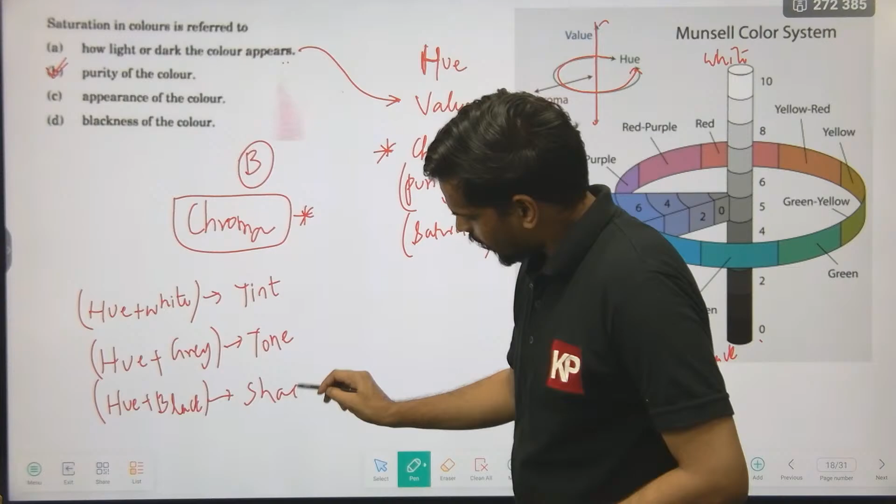And finally, mixture of a hue with various levels of black is called as shades of a color. So what are shades of a color, or how do you generate shades of a color? You mix a hue with various levels of black. So tint, tone, and shade are also terms which you can remember from color theory point of view. Hue, value, chroma, tint, tone, shade. These are the 6 points which you have to remember with respect to color systems and color theory. Let's look into the next question.

Which of the following colors stand out in relation to the other nearby hues? So this is a term which is generally used in interior design. Say in interior design, you might have seen this also in shopping interiors and all. If you're having walls with a plain color, or say something close to white, or something very light color, to make some features stand out, could be some louvers, or could be some boundary treatment, or say the margins of some interior components, they're generally highlighted with a brighter color. Could be something like red, or something similar to that, right?

So that in interior design is referred to as an accent color. Accent color is basically a color which is used to highlight things. If in a composition you want to highlight something, you use a different color to complement it. That is an accent color in color composition. Decent color, important color are not relevant terms. Analogous colors are basically those colors which do not stand out.

If in a composition you're having three colors which are almost similar, so generally in a color wheel, continuous colors in a color wheel are called as analogous colors. If you look into a color wheel, if you take any three continuous colors, they are almost similar to each other on a color wheel. So nothing will stand out drastically. That's called as analogous colors.

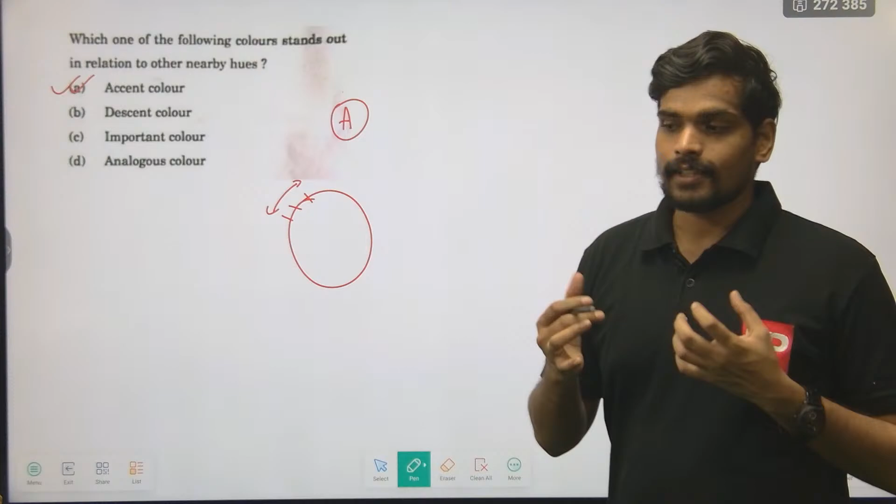The answer here will be option A, accent colors, where something stands out. They're talking about which color stands out in relation to other hues. Accent color will be the appropriate answer for this question.

Next one. Which one of the following is a progression of whole numbers wherein each term is the sum of the preceding two numbers? So there's a sequence which is used in proportions and aesthetic proportions. Just like how you have golden ratio, golden proportion, you also have a series which is generally associated with golden ratio itself. So this sequence is said to be a close approximation of golden spiral as well, golden series as well.

So basically you're talking about a sequence of whole numbers where each number is a sum of the previous two digits. So generally it starts with 0 and 1. 0 plus 1 you'll write as the next digit. Add the two digits, again you'll get the next digit. 1 plus 1 you'll get 2. Add the previous two digits and get the next digit 3. Add the previous two digits, you will get 5. Add the two previous digits, you will get 8. Add the two previous digits, you will get 13.

And this sequence is called as Fibonacci series. So option B will be the appropriate answer. A series which is considered to be a close approximation, which is said to be associated with golden ratio, wherein each number is sum of the previous two digits, is called as Fibonacci series. So B is the appropriate answer for this question. Next one.

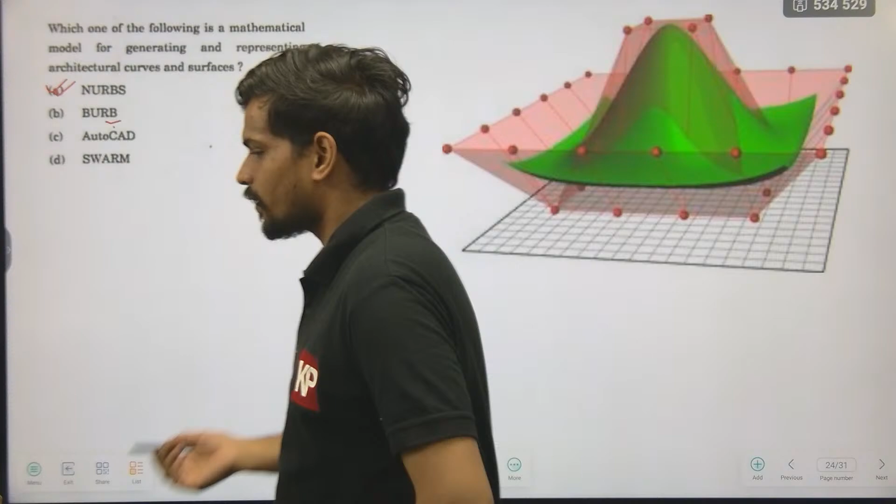So NURBS is an acronym for non-uniform. You can remember the full form of it also. Non-uniform rational basis spline. That's the full form for NURBS.

It's a mathematical model used to generate 3D surfaces used in architectural curves and features too. So NURBS would be the answer for this question. The term is very frequently used in 3ds Max and other 3D software in architecture as well.

Next question. As per the Manual of Architectural Practice, MAP, of Council of Architecture, so there are various volumes of this, which of the following tenders quote a fixed price? If the quote is varied, it involves contractual problems and methodology to arrive at the rates for addition, deletion, and alterations would be necessary, and it is to be built in the tender document.

So they're talking about a contract, or they're talking about a tender where there's a fixed price, and that's the quantity, that's the final price of the tender. If there is any change in it, it will create contractual problems. To address those problems, there should be a preset level of conditions already written into the tender documents. So which type of tender is it?

Cost plus fee tender? That's not an answer, because in cost plus fee tender the cost is not fixed. Whatever work is going on, that cost will be borne by the owner or the concerned authority, and a contractor will get a particular fee at the end. So that's an altogether different approach. That's not the answer. Turnkey tender.

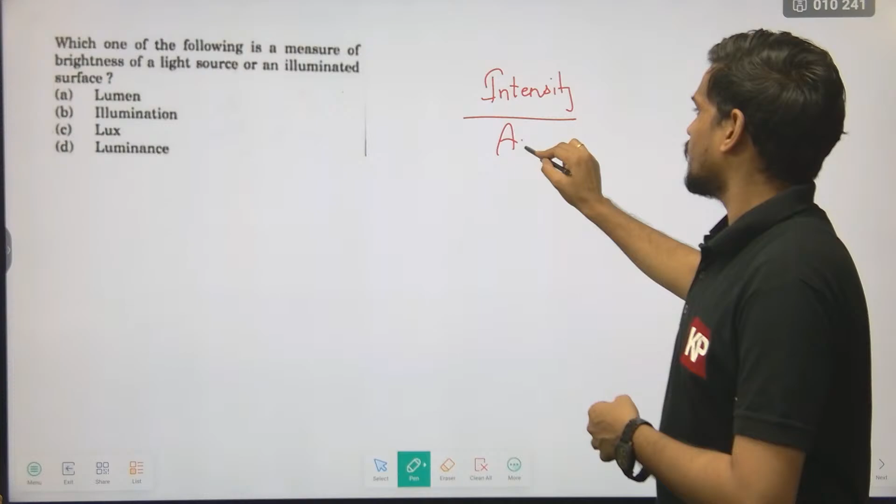So next one, which one of the following is a measure of brightness of a light source? So brightness of a light source or an illuminated surface, how bright a surface looks, be it a source. Generally this term is used for brightness of screens. Say this is a digital screen which is emitting light. So how much intensity is it releasing per unit area? Luminous intensity per unit area is called luminance, and this measures the brightness of a surface. Even a normal wall, any surface, how bright it is depends on its luminance. Luminance is the luminous intensity of that surface per unit area. This is called luminance.

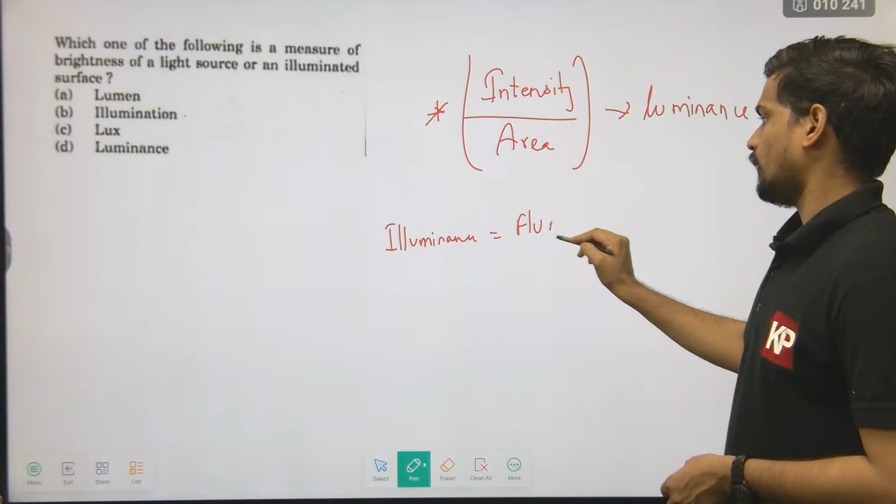Do not make a mistake, luminance and illuminance are different. Illuminance, on the other hand, is flux per unit area. Illuminance is flux received per unit area. It doesn't tell you how bright a surface is; it rather tells you how clear a surface is, or how much energy is received, how much luminous energy is received per unit area. And always remember, illuminance is generally measured only for surfaces but not for a light source.

How bright a light source or any surface is, that is intensity per unit area, which is luminance. So option D will be the appropriate answer for this question. You can also use an elimination approach here. Illumination and lux value both are the same. Illumination itself is measured in lux, so B and C can together be removed. Lumen is a measurement of flux. Obviously it is not a measurement of how bright a surface is. Luminance will be the appropriate answer. That's question number 28 for today.

29th question for today. Which one of the following is the lowest inside point of a pipe, culvert or a channel? If you look into a pipe cross section, the lowest point in the interior of it, that's called the invert level of the pipe. The lowest point in the interior of a pipe cross section or a channel is called the invert level. The topmost interior point of a pipe or a channel is called the obvert level. That's the opposite of invert level. Obvert level and invert level. From the given options, they are talking about the lowest point, so option A, invert level, will be the appropriate answer. Next one, the last question for today.